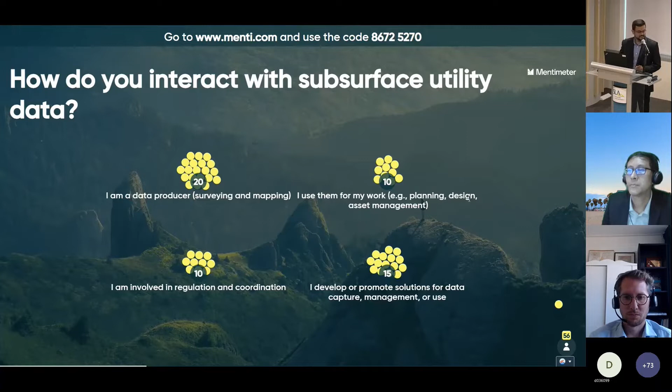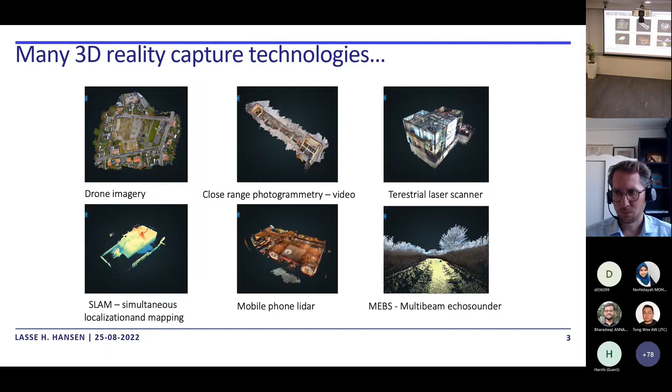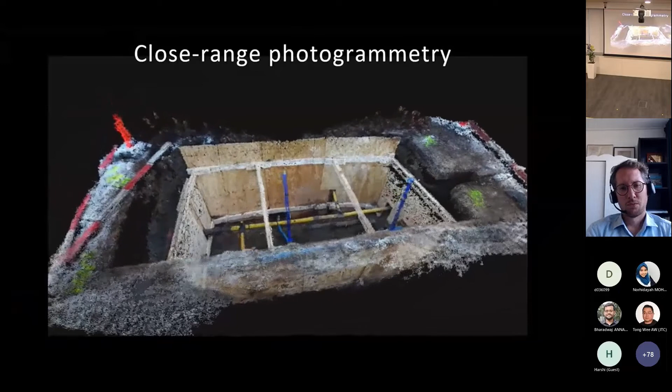But what we will be focusing on today, at least the solution we used for our 3D capture solution, is close-range photogrammetry. Photogrammetry, just a brief introduction - think of it like, photography is the science of taking something 3D and projecting it into a 2D image. Photogrammetry is the opposite, right? So you take some 2D images and recreate it in a 3D scene. That is what we have used for our technology.

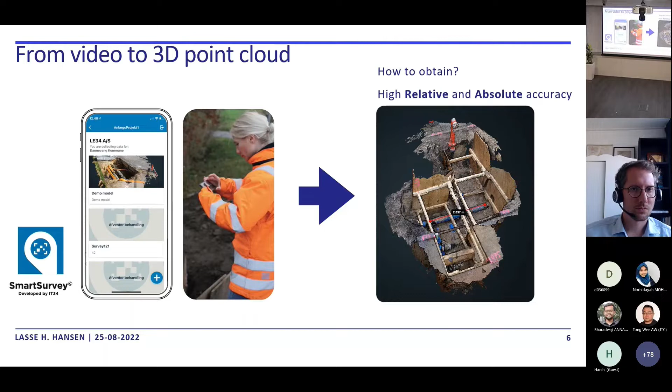Now let me introduce this low barrier to entry data capture. I chose this term because I see both our solution, SmartSurvey, and other solutions in the market can be categorized as low barrier to entry. It's really because of the power of the new technology, all the powerful sensors that we have in the smartphones that we carry each day. So this was really our idea - to take your everyday phone and turn it into, you can say, a 3D scanner, but something that takes a video and creates a point cloud. The objective is really to try to make a point cloud, or take a point cloud, that has high relative and absolute accuracy. This is what I will try to show you today, how we can do this with SmartSurvey.

I, together with HSC, these couple of days we have been hitting the streets and testing out SmartSurvey and other 3D capture solutions. So this is me with Dexter, Kian, and Fuji, and this has really been great that they made this opportunity possible.

What I realized doing this, is that Singapore is very, very hot. I had the original idea that we should do this out on the street, so we should just gather around and try out these capture technologies. But oh my God, it was thankful that somebody told me, okay, let's just video record everything and take it back here, so we don't have to struggle with the heat, because it is really hot out there in Singapore. So this is what we did.

This is from Middle Road, me and Dexter, and I will take you through the data capture workflow. The first thing you need to do is spray GCP markings, ground control points. You can do that with spray paint or something like that. Our recommendation is to do at least 4 markings close to the circumference of the excavation.

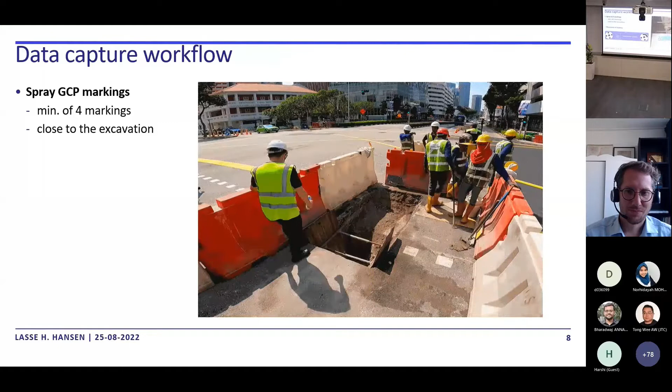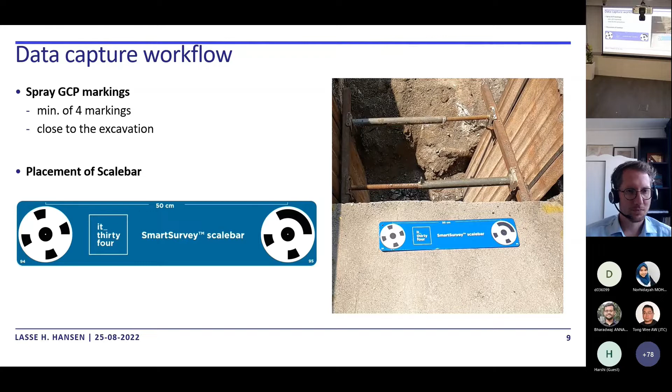The other thing we have also implemented in our data capture workflow is the use of a scale bar. This scale bar, you also place close to the excavation hole. It has visual markers, and these markers are placed exactly 50 centimeters apart from each other. So our photogrammetry algorithm detects these visual markers, and then it knows that these are 50 centimeters apart.

The next thing you have to do, of course, is video record. We made SmartSurvey very versatile - you can take whatever phone you have, Android, iPhone, and then you have to do a smooth and steady movement.

Recommended is having a bit of tilt. Also, really capture the pipe of what is interesting, and also remember to capture the GCP markings and the scale bar.

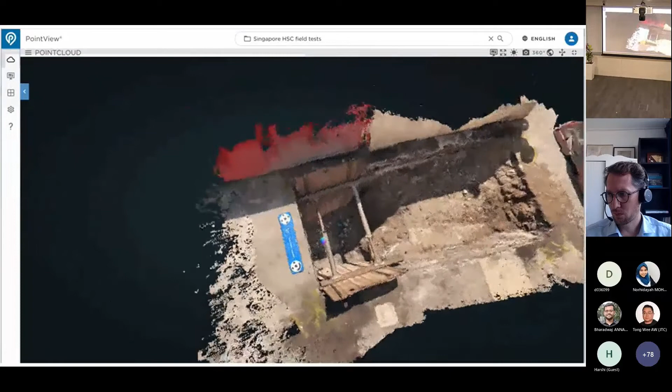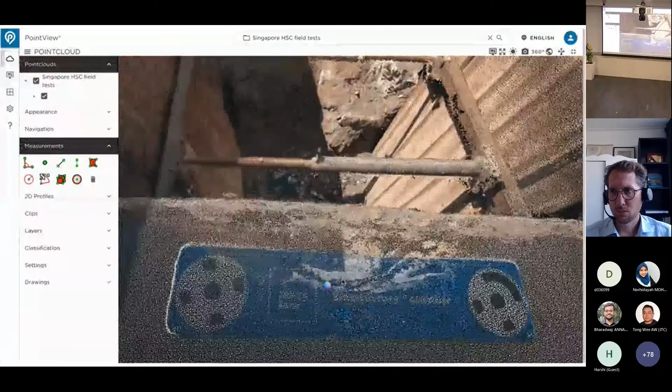So if we just stop here and only have these two data, only have the video from the iPhone, because we have the initial GPS from the iPhone - nothing really accurate, but we can get an indication of where we are - we can make a 3D point cloud just out of that. It looks really detailed, and because we also have this scale bar in view, what you can see I'm doing here is putting in a measurement between the two dots and the centers, and it should be around 50 centimeters. So that's pretty close. So what we actually achieve is a 3D point cloud that has a very high relative accuracy.

Of course, we would also like this to have a high geographic absolute accuracy. So what could be the second step is to, of course, measure these GCP markings, using whatever preferred survey equipment that you have.

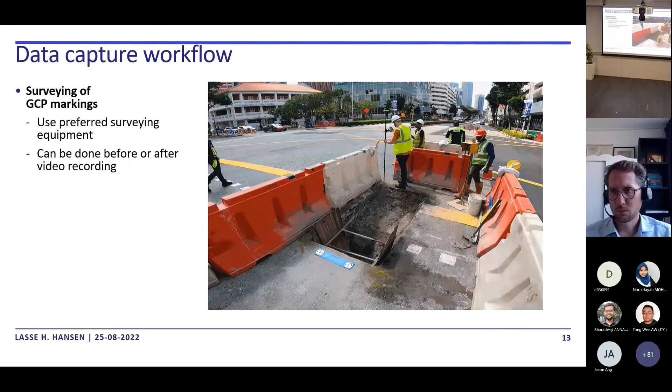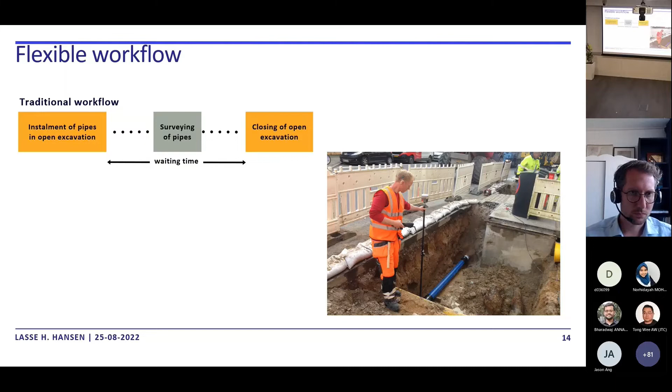I think it's important to note that this could both be done after or before video recording. And I would like to make a point that maybe this could make for an interesting workflow, because traditionally, when you have installed your pipes in your excavation, you kind of have to have a surveyor come out and survey the pipes before the excavation gets closed. And for that, it can be a bit inflexible because there can be a lot of waiting time in between.

With SmartSurvey, it makes it possible to have another workflow where, as long as you have marked the GCP markings and have video recorded, you could actually go out afterwards and measure the GCP markings. This, for example, is from another site where we went out the next day - you maybe don't want to wait a week because then the markings will be washed away, but it is actually possible to go back and measure these markings again. That is for sure an interesting aspect.

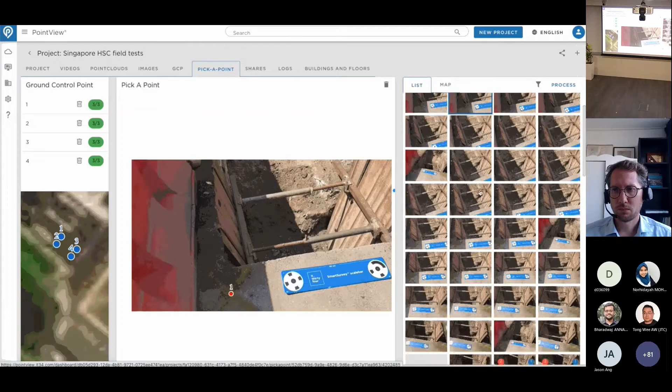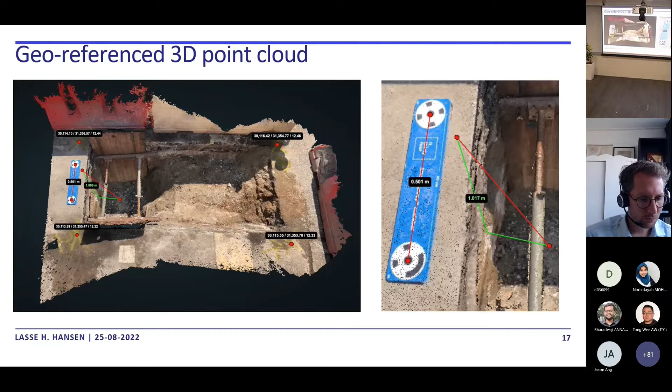The next step is really, now that we have your coordinates and your GCP markings - this is from PointView, where our video ends up from SmartSurvey, and here we do what we call pick a point. So we georeference all the coordinates to the image, and by doing that georeferencing, we end up with a georeferenced 3D point cloud. That is at least one way to end up with the result of a georeferenced 3D point cloud.

I want also to mention something about the best practice of video recording. So here we are at another site with a pipe-laying trench, and how you video record and what kind of phone you use definitely also matters. I have taken here two cases.

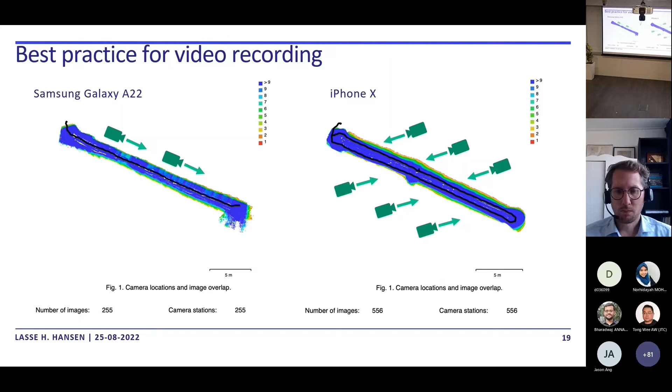One is with a budget smartphone, the Samsung A series, where I only did one walkthrough down the trench, and the other I used an iPhone X - not really a high-end phone anymore, but it certainly was high-end four years ago or something like that. With the iPhone, I walked around the pipe trench, and what you also see is that it certainly had a lot more images and also from different angles of the trench. And here's the result.

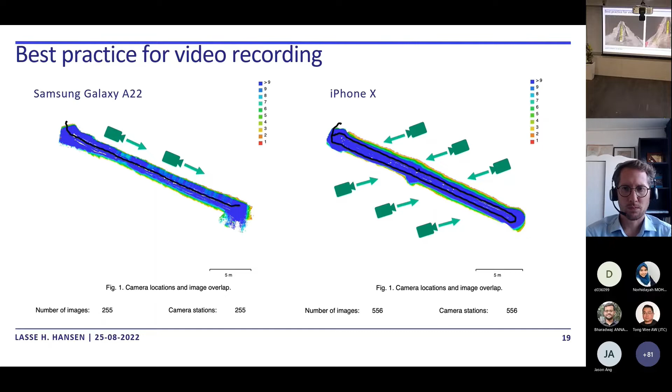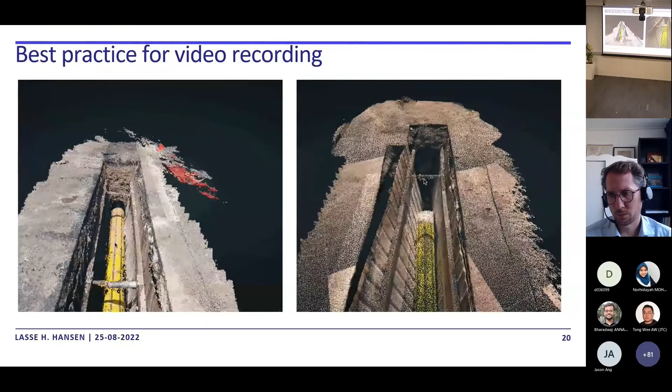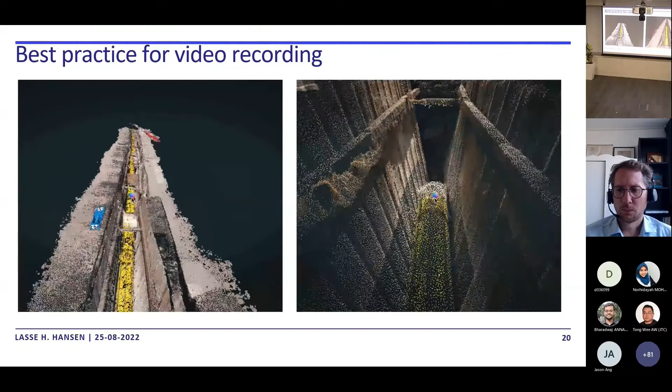Not that I would say either of these point clouds are bad, but visually it is for sure that this one on the right side is more high quality, and the fidelity of the point cloud is better. Also notice how, the thing with photogrammetry is it only captures what you record, right? So if you don't get it from a certain view, it will not end up in your 3D point cloud.

Okay, so you have probably also seen the teaser video from this workshop, and here there was this smart external GNSS antenna attached to it, and this is also something done - something new we have done here with SmartSurvey. So we tried to see, could we even make it even smarter?

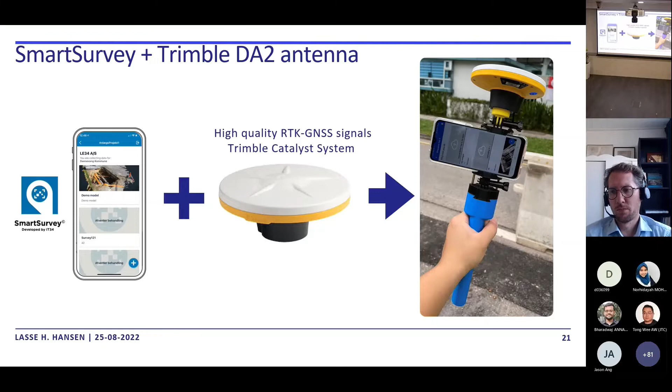So what we did was we used the Trimble DA2 antenna. Maybe some of you know Trimble, but it's a high quality GNSS antenna, and it works with the Trimble Catalyst system. So just as I showed in the video, we now combine both the video recording together with a 3D path we track alongside the video.

And the end result is the same. We end up with a detailed 3D point cloud that is also georeferenced. So this is maybe a smarter workflow, and definitely in terms of improvements, I would say it's a faster workflow. You don't need the GCP marking stuff, and you don't need the manual work of doing pick and point. And I would also say it has less human errors because it's less manual work.

And we actually also see it is more accurate if, of course, the GNSS signal is good enough. But if it is good enough, we take many more position coordinates along the video paths.

And the last thing I wanted to say is that this is now working together with the Trimble DA2 antenna, but we are also expecting to support more antennas. So this is really exciting, what we are trying to develop here, we think.

And you probably also want to know about accuracy, right? I've talked a lot about trying to get to relatively good accuracies. So we did some accuracy evaluation also.

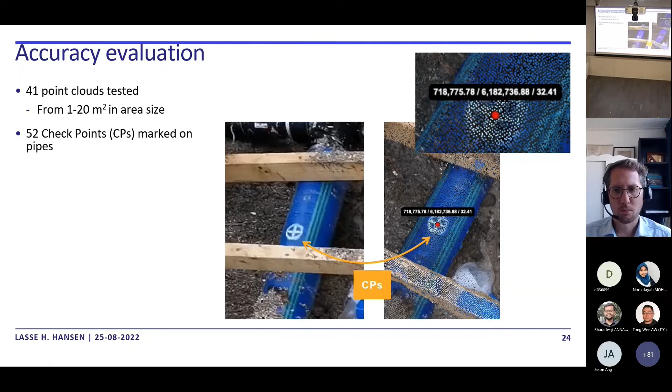Here were our results. We got a root mean square error of around 3 centimeters. So I think we are very comfortable saying that, also across other uses of this, we see an absolute accuracy around 2 to 4 centimeters.

It is, of course, again depending on how well the survey equipment you have used for the GCP markings, and how well you have done the pick and point precision.

Again, I would also say that the relative accuracy, so for doing measurements inside the point cloud, the relative accuracy we can get below 1 centimeter if we use the scale bars also.

Also just to mention, this was a test done with the GCP workflow, but we have also, of course, done a test just now with the Trimble DA2 antenna, and we get a similar result, if even better.

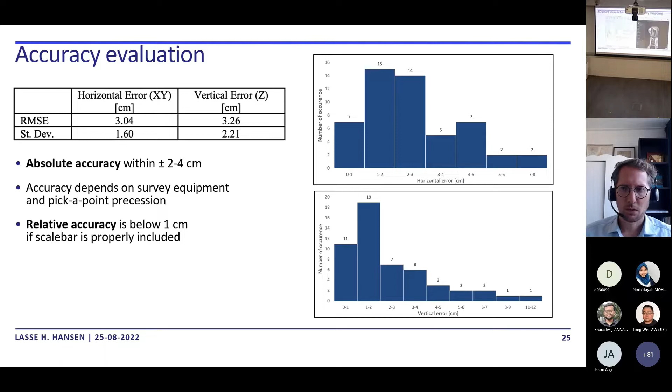So what now after surveying, right? SmartSurvey was developed together with utility companies in Denmark, so there was really also a focus on what to use it for after surveying.

So for mapping, and what we have been doing together with the utility companies in Denmark, that Michaela—she's one of them, the last speaker, she'll talk more about—is how we digitalize inside the 3D point clouds.

So we actually do the traditional utility mapping inside the point cloud, and then we take this vector line we draw on the point cloud, and we can then directly import it into our GIS system, whatever system the utility companies are using.

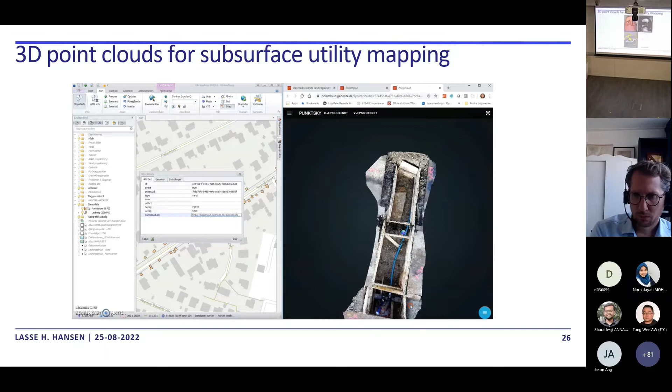All right, okay, so the last thing is I wanted to recap why we do this, and I want to use this Mr. Incredible meme that I like very much, because it describes the cycle of a utility, right? So the installed utility, like in the physical world, that's Mr. Incredible.

Then it goes through this data quality loss process. So maybe the contractor doesn't deliver all the information, and then everything is flattened into a map and becomes this utility map, and afterwards we take the utility map and spread that onto the surface again.

So if we really look at it, I would say that what we are doing with traditional surveying and producing maps is really just taking information and representing this representation of Mr. Incredible. And what SmartSurvey does is really try to store the actual 3D representation of Mr. Incredible as a 3D documentation source.

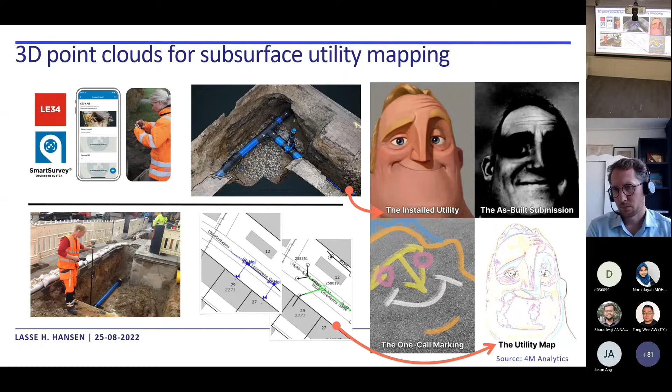Yeah, that's it from my side.

Any questions? Yeah. One minute.

I think different solutions come from different needs and directions. From our side, it was really a cooperation between clients and others that started our development of SmartSurvey. So I see different directions, but going in the same direction, sort of.

Yeah, really good answer. Thank you, Lasse, and Bharat, over to you. Yeah, thanks, thanks Rob, and thank you once again, Dr. Lasse.

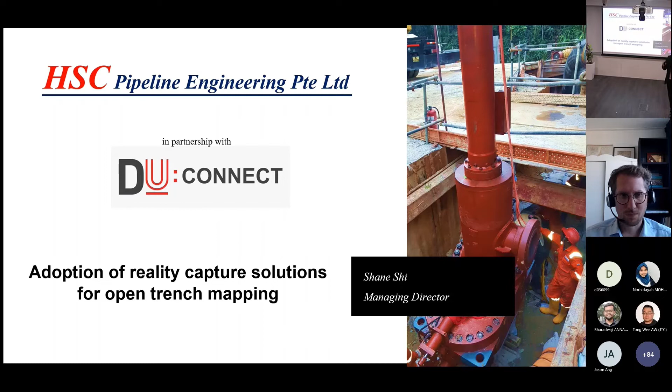HSC Pipeline Engineering is actually a trenching contractor. We have done this for 30 years. We have been doing gas pipes, water pipes, utilities in general. So we are very familiar with the cut and cover and the issues surrounding this particular activity. So we're just going to quickly run through the problem, the solutions, and some of the advantages that we see in adopting reality capture.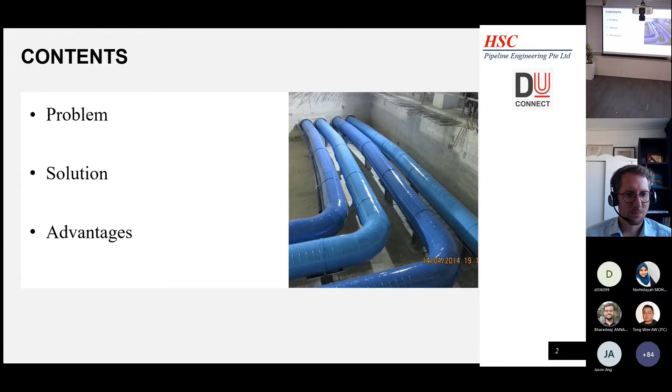I think our peers here will be very familiar with trenching on the road type of activity. It is crazy because in a construction site, maybe 8 o'clock we can start work, then continue to work maybe until 8, 10 o'clock, depending on the site, especially in developments or HDB developments. But when we talk about LTA roads, it's a totally different ballgame.

Because if at 8 o'clock, when you're driving to work, there's a contractor blocking the road, the first thing you will do is call LTA: hey, the contractor blocked the road already. Then at 5:30 or 6 o'clock, when you're driving back from work to home, you see another contractor blocking the road, you also can call LTA: hey, this contractor is still working on the road at this hour. So we're actually bounded very strongly by the road opening hours, which is 9:30 to 5.

Then between 12 to 2, we will be doing pipe laying. We're joining all the pipes, pipe fusion, electrofusion, joining, coupling, whatever. Then we actually need to start backfill at 2 to 2:30, graded stone 2:30 to 3:30, premix 3:30 to 5. By 5, we have to open the road. If not, 5:15, LTA with their smart camera can see us, then they call us: HSC, why haven't you opened up the road? How long are you going to take? Blah, blah, blah. And within all these activities, we are so packed already.

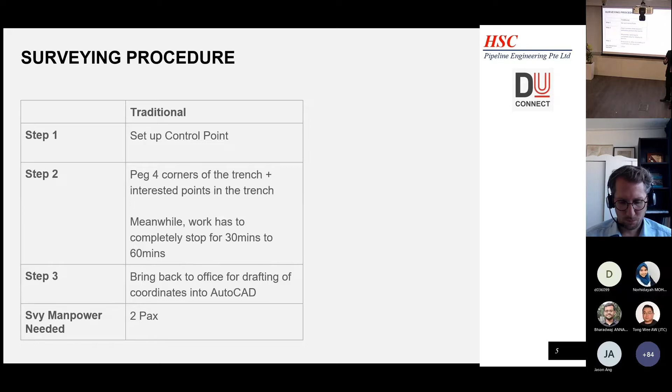Step 3 is very simple. Once you've collected all the data, we bring it back to the office and the draftsman's job is ready. The survey manpower, not including drivers or transportation, the survey team is minimum two people, one with the station, one with the ruler.

Then we extrapolate this issue, and it's even bigger. Every excavation team actually needs one survey team, because right now I only have one team to survey at 2 o'clock. I cannot have the next team at 3 o'clock, the next at 4 o'clock. We cannot say one survey team serves 5 excavation teams at 9, 10, 11, 12 o'clock, no way. So effectively we need one survey team to one excavation team. In today's context, with severe lack of manpower and severe lack of trained manpower, this is actually a very big issue.

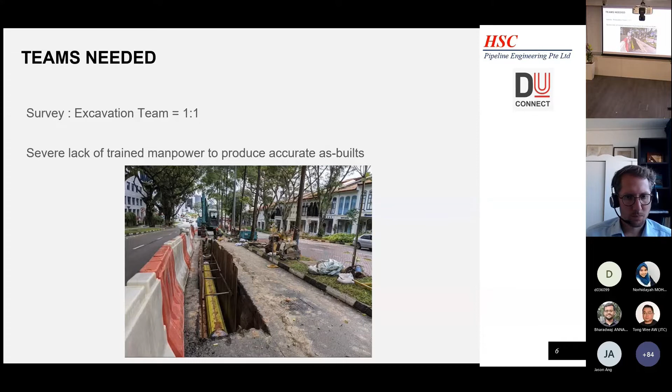So the solution we realize is already there, we just need to look for it. Under the SLA Code of Practice Standards and Specification for Utility Survey in Singapore, version 1.1, as-built surveys can actually be done performing total station, which we're very familiar with, GNSS RTK, also familiar with, and 3D laser scanning.

So this is what we are using, as we came to realize this is a very good solution. Number one, we use the iPhone 12, but please make sure it's the Pro series - I'll explain a bit more. We use the ViDoc, we use Pix4D Catch and Pix4D Cloud, and just one man. So what is this combination?

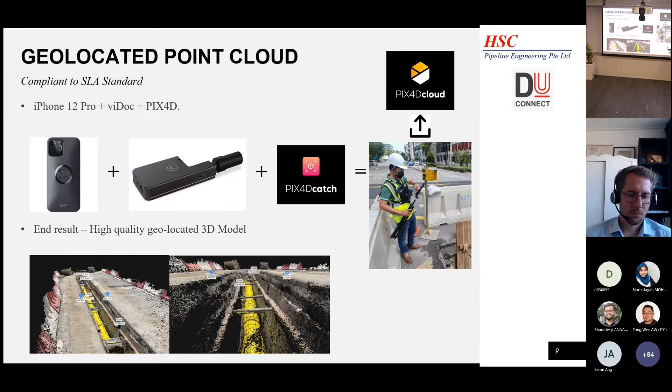We are still using photogrammetry, still taking photos, capturing data from there. We are using the ViDoc as the GNSS RTK that gives you geolocation, and we are using LiDAR points - the iPhone 12 Pro series actually has LiDAR - so it combines these 3 data sets to give you a very highly accurate geolocated point cloud. You'll be able to see something like that, and we'll explain a bit further, but you can see this is a one-man operation, similar to SmartSurvey.

So now we change our process a little bit. Instead of setting up a control point which might take some time, we just turn on everything and check that the satellite signal is okay. Number 2, we capture, we walk along the trench, but the work doesn't have to stop. Step 3, finish already, same as before - we upload to the point cloud, then it's the drafter's problem, and we pass it back to the drafter.

I think the best part is here - in survey team manpower wise, we actually just need one person. So imagine now you have 2 techs, you can separate into 2, you can have 2 teams. So that is very cost efficient for the survey teams as well.

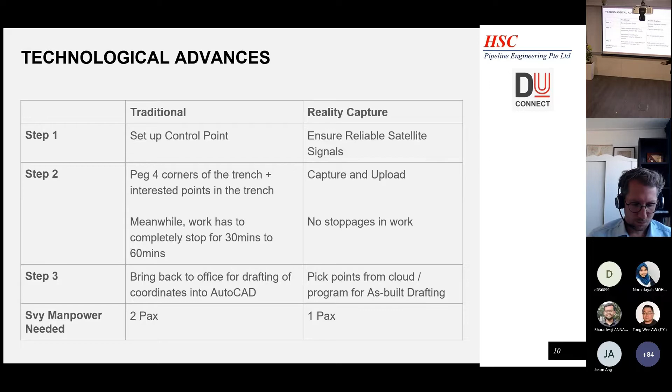So this is how the thing is done. Same trench, same site - actually both of us use the same time. So we just capture along the trench.

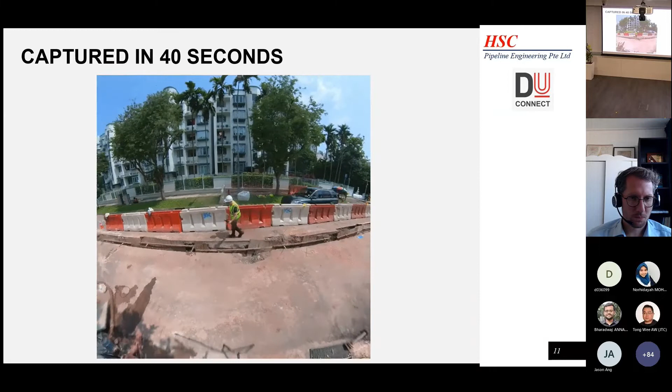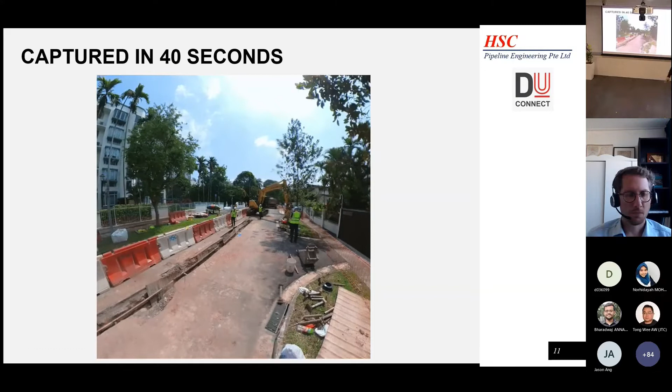And it's done. The good thing about Pix4D Catch is that when we use it, there's some visual elements inside the app itself that tell you the point clouds are being captured. You'll see this cloud that slowly backs away, then you know that this part is already captured, and you're safe to carry on with the capture.

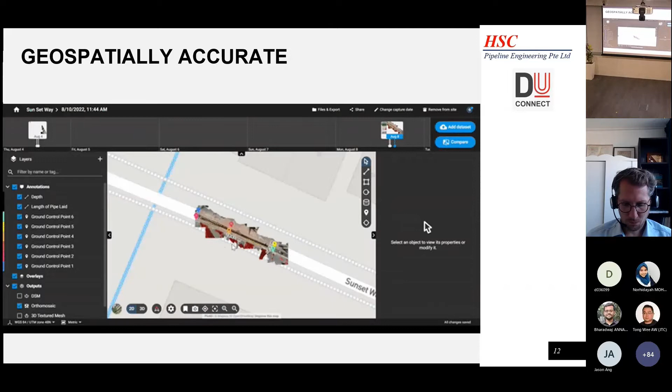And it's actually geospatially accurate, given this setup. So we can zoom into the location. The location you can see in street view, satellite view, and you can also know - okay, the next one, sorry.

So this is topography. That means when we click, okay, Northing, Easting in the Singapore context - so there's no conversion that's needed as compared to if you're using long-lat type systems.

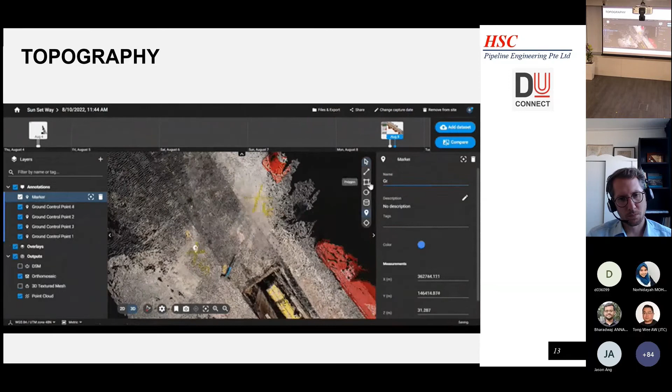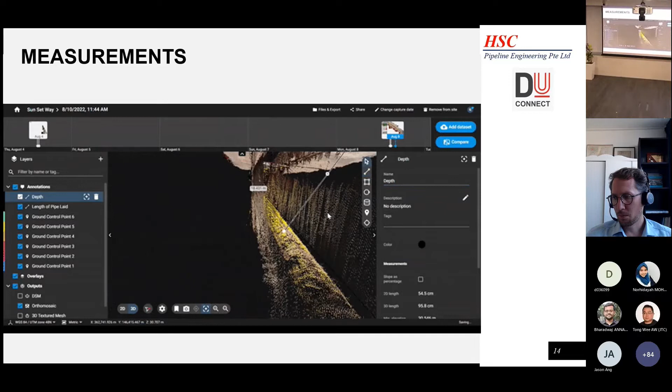Measurements can be done in any part of the trench that you need. You can click from the point cloud, from the point on top of the road to the point on top of the pipe, and you get a pipe depth. If you click from the start of the pipe to the fitting, you know the length of the pipe, or to the joint, you know the fitting length. This gives us a very comprehensive point cloud that we can use, and we can extract a lot of data from here.

For reality capture, I think the best part is that in the bigger context, when we excavate, we will start to see a lot of services crossing, and we can capture this to better update certain services plans and utility maps as we go along.

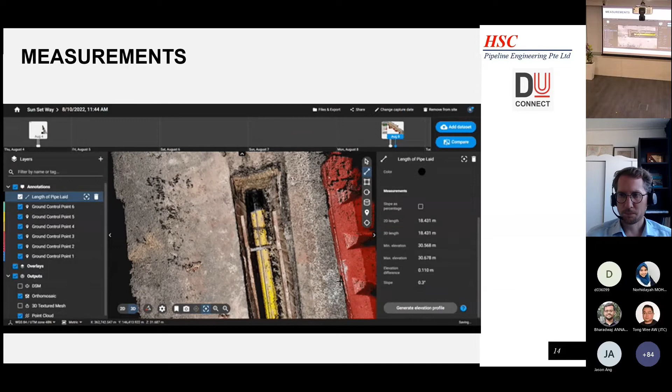So you see all the lengths, all this is there. Seeing is believing.

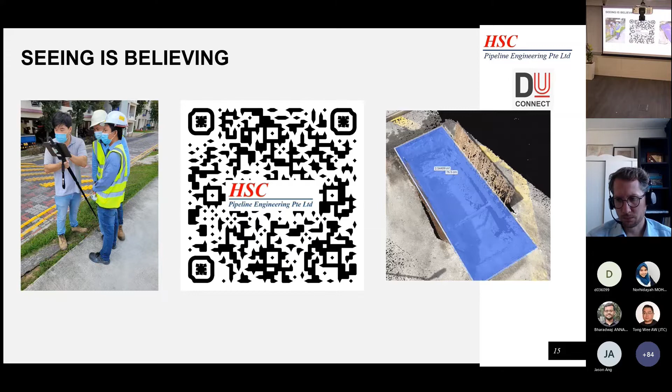So we can measure areas. Some contractors, some clients, they like to see what's the volume of excavation. Then you can do this. They want to see what's the area they excavate. You also can do this.

So it's something that is easy to do, and this is much less intensive in my mind for the guy that is capturing the points. Maybe they miss certain points, but now we capture, we bring it back to the office, and if you want to check any point, it's also possible.

So advantages - this is just making real business sense. A traditional total station can cost something like 30 to 50K. This is something that is open to everybody, nothing hiding. Of course, you can use the Rolls Royce of total stations - all this is up to you.

Manpower typically costs 4K, inclusive of everything - for example, levy, and so on. So each person costs about 4K. If you take a 2-man team, that's 8K, times 12 is 96K. 96K plus 50K, on the higher side, is 146K annually. If you use reality capture, our setup costs about 12K. One pax is 4K, times 12 is 48K. 48K plus 12K is 60K. So you have 60K compared to 146K.

That's just the first year. In the second year, you technically do not need to pay for the equipment anymore. And your 2-man team becomes two 1-man teams, doubling the revenue.

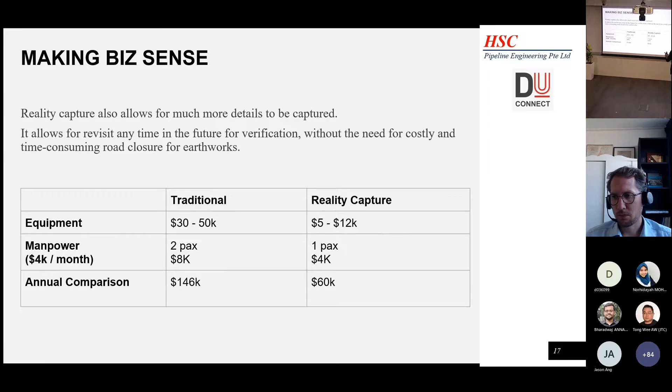So that's the end of the presentation. I'm more technical, more down to the ground, to talk about what's realistic on the ground and whether we can make business sense out of reality capture.

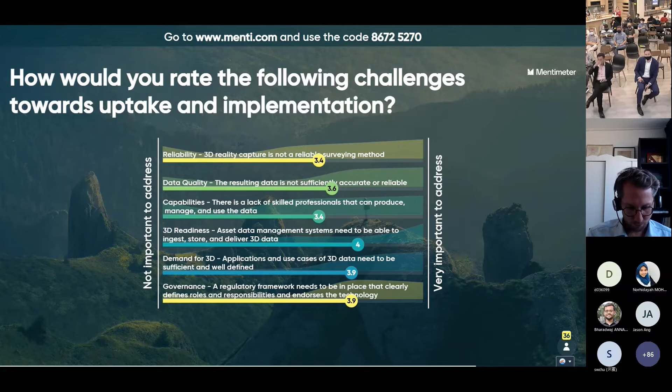Hello, everyone. So you're asking about the gap in the technology development, right? Well, I think the gap is, I guess, as the technology develops, the gap will always be there, but it's always a new gap, right? So technology is continuously developing. So yesterday's gap is today's solution, and then there's a new gap every now and again. So it's difficult to pinpoint a particular gap, I would say.

Agree. Yeah. Thank you. Thank you.

And the other question is about the capabilities. I think even Shane was mentioning about the lack of skilled, qualified professionals. Any registered surveyors here? Maybe I can name Mr. Chia Ekok. Maybe if you want to attract more talents, what can be done from the government side?

Chia Ekok. Give me a minute, I'll pass over the mic to you.

I think it's a well-known fact that in Singapore there's no institute that provides training for land surveying. Even Polytechnic has stopped the land surveying course for a long time already. So we are now taking in a lot of graduates.

From Malaysia, and my company took in a lot from China. So we will need these people to be able to assist us in the processing of the data.

Thank you for your interest and inviting me for this digital underground connect. As told before, my name is Michaela Bloch Eiris. I have 20 years of experience working in Danish utilities. Now I work at the Kalundborg utility, which is a smaller utility. We supply our customers with water, wastewater, and district heating.

I have in the last 5 years participated actively in the development and implementation of point clouds. I have given many presentations about how I implement point clouds, but never in English. So let me know if some of my points are not so clear to you.

When Lasse was doing his research work, he brought 3 utilities together and formed a group that discusses the spread of point clouds in utility companies in Denmark. The 3 utility companies are Aarhus Utility, Novafos, and Kalundborg Utility. Novafos and Aarhus utilities are big companies in a Danish context.

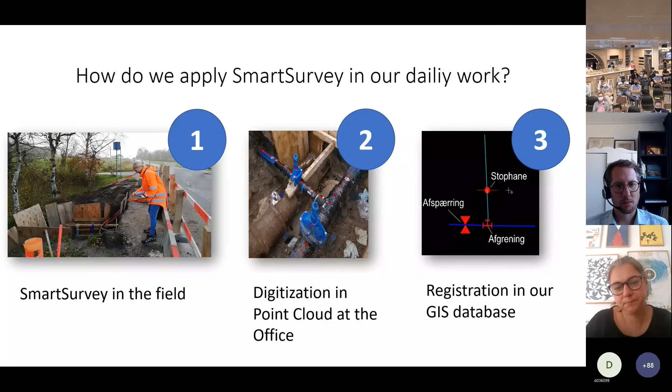All point clouds generated with SmartSurvey is automatically available to the organization in the utility. This is a very important point in implementation, that data is available to the organization. And I will now show you how Novafos uses their WebGIS solution to display their point clouds.

So I will go live now and show you. So what you see, I hope you can see the WebGIS solution now. As I told you, this is the Novafos WebGIS solution. So they have the classic traditional water supply registration here.

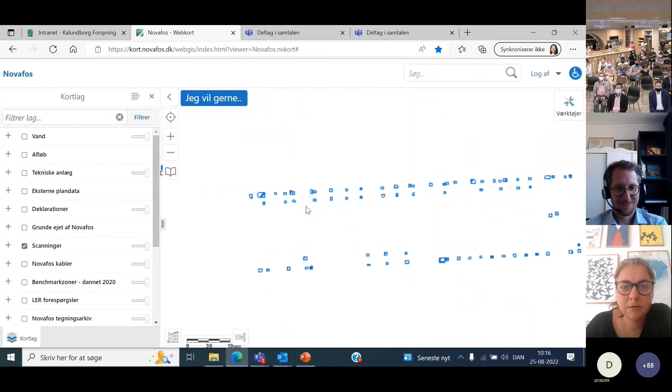And they also have the point clouds. It's a little bit small. I can zoom in now, and then we should come to the bookmark. I will zoom in here, and we will see the point clouds.

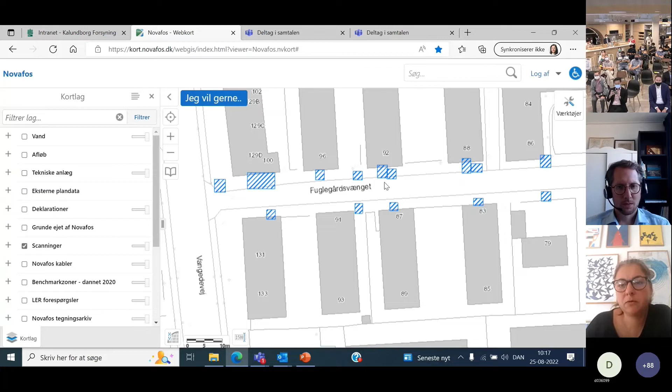So this is a project where they have done some renovation for the water supply, and here you have all the point clouds. To see the point clouds, you have to click on the polygon, and you come into the point cloud. Now the point cloud is loaded into the viewer, and it is always this viewer that is used to view the point clouds.

Novafos has about 6,000 point clouds, because they have decided that all open trenches should be filmed, and they make these point clouds of this. The last 4 years they have been doing that. So now they have about 6,000 of these point clouds for their water supply. And this is one of them. So this is the viewer they always use to look at them, and they can panorate and look at the point cloud. I think Lasse showed you that before. It's the same.

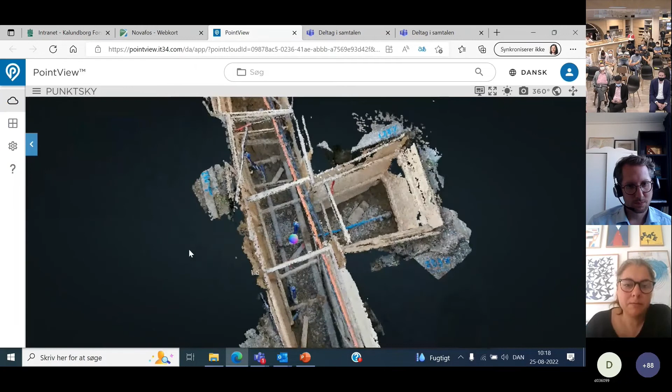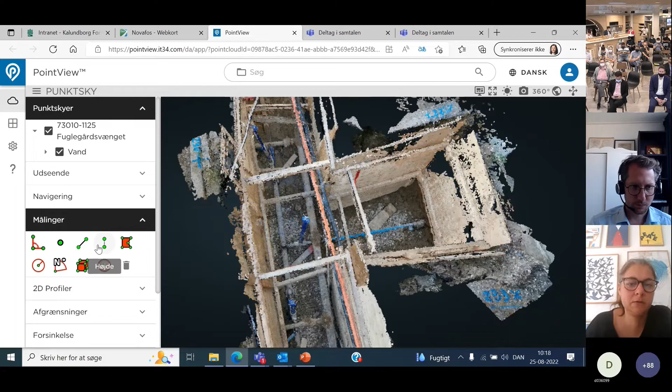They also have some tools available. The measuring tool is the most used tool in this viewer, and it is used to measure. They can place this and see the coordinates, whatever they want. They can measure the distance and the height.

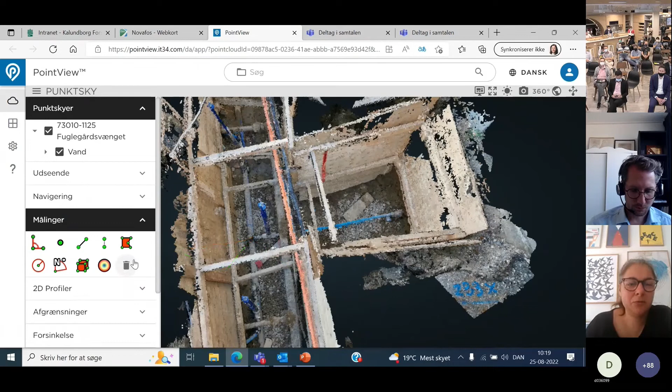And I think these tools are used very often in the organization, and they know how to use it now, because it's the same viewer every time they open the PointView. Another tool that is used is the drawing tool.

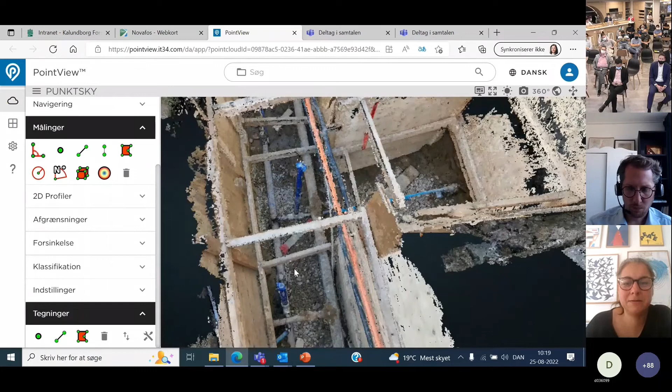And as I told you, we have people who digitalize the assets, and they use this drawing tool. They digitalize the pipe here, and now the pipe is digitalized, and they can export it as a GIS file, and then afterwards import it into our GIS database, and then you have the traditional GIS registration as I showed before. This is how we use point clouds for the water supply.

I also have an example from wastewater. Yes, it's the red one here. This point cloud I will show you now is not from SmartSurvey. This point cloud is made from laser scan, and the reason for that is that in wastewater we often have very deep and dark trenches. So SmartSurvey is not good for that.

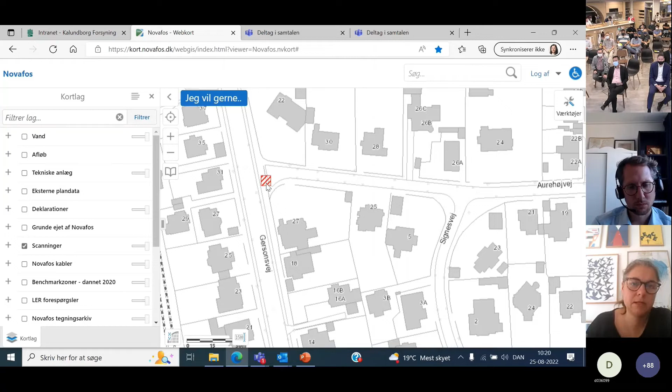So we use laser scan to scan our manholes, and this is an example. Again, the link, and we get the point cloud in the same viewer. This is a manhole for wastewater, and again, panorate, it's the same. You can go into the manhole.

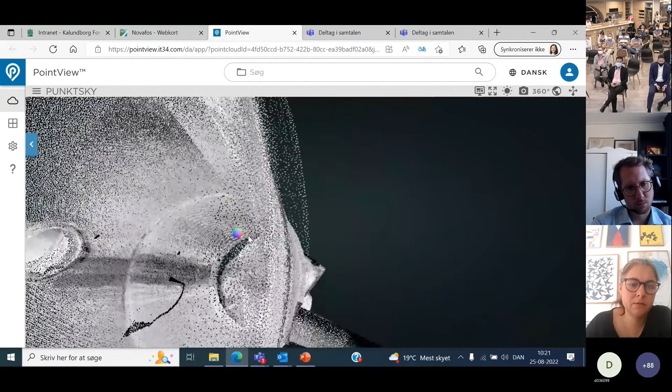And you can look up the data you want. I can show you, I have to panorate. You can see here we have the pipe from the... go into the, yeah, I got that. And you can get the same data.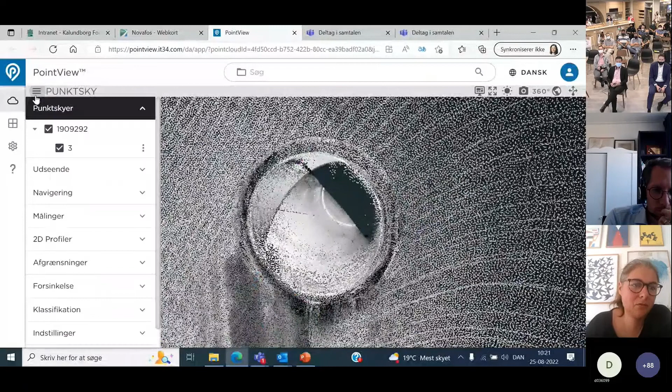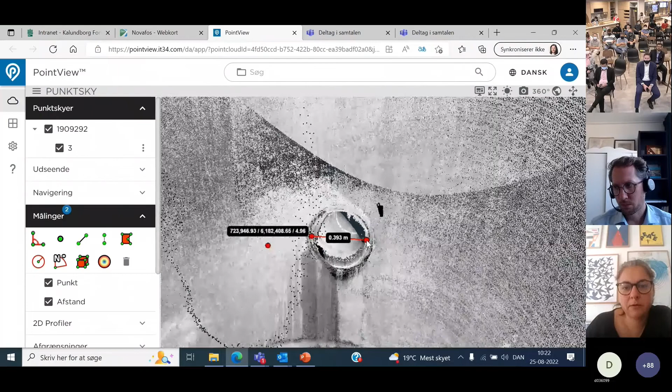Again, measuring tool, and again this is very often used to look up some data about coordinates in wastewater. And you can measure the diameter of the pipe, also very used. So we also have documented many of our manholes in this way for wastewater.

So it is very useful for our staff in the utility. So this was the Novafos WebGIS solution, and I will go back to the presentation.

So what are the benefits of using these point clouds? I see some related to documentation of the construction work in the field. We can check that the installation work has been carried out correctly. Our operation manager looks through all the point clouds to check the construction work, and they find errors. And they can check that the distance requirements to other assets are complied with. Sometimes there is a disagreement about if the distance requirements are met, and the point cloud is a great tool in this context. The point cloud can be used to estimate the amount of soil and the size of the trench.

Sometimes there is a discussion between the utility and the entrepreneur about the amount of soil and the size of the trench. This is a money question, and the point cloud can often clarify this.

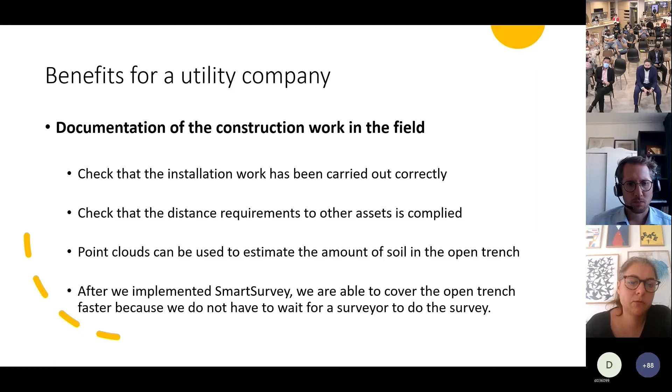Point clouds are a supplement to the traditional utility registration. You can measure and orientate yourself in a completely different way than in the traditional utility registration, as I showed in the Novafos PointView viewer.

Information from the point cloud can be used for future design and planning. We can look up in the viewer and see all the details from the latest construction. An example could be backfilling, which is often not registered in traditional utility data.

Another benefit is that this new data can lead to development of new solutions that benefit the utility, and I will come back to this issue later in the presentation.

So what are the challenges then? The best point clouds are made by daylight, as I showed you with the wastewater manhole. Alternatively, a light source must be brought along, and also the best point clouds are made when the trench is not too deep.

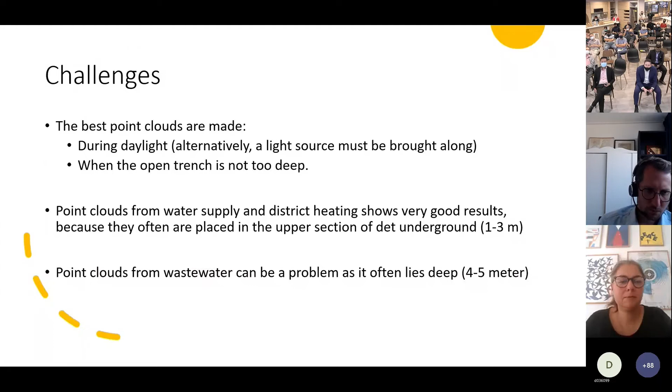The benefits are not limited to the individual utility. Sharing point clouds could provide value to other asset owners in the underground. In Denmark, we have LER, a register of assets in the underground. In LER, all assets are registered by traditional mapping, and it is a legal requirement to obtain this information before working in the underground.

So the point is that we have to share the point clouds, and I believe it should be a legal requirement.

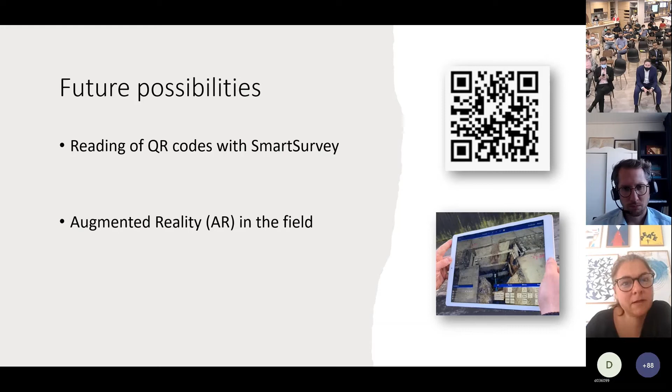Can QR codes be captured by SmartSurvey? We have investigated if it's possible for QR codes placed on pipes and components to be read from point clouds. The QR code contains a link to an API to a catalog where you can capture information about the product, for example material or diameter. This means we can automate the process of getting attributes on our utility mapping and thereby expectedly increase the data quality. This project is on an experimental basis, but has great support among several water suppliers in Denmark.

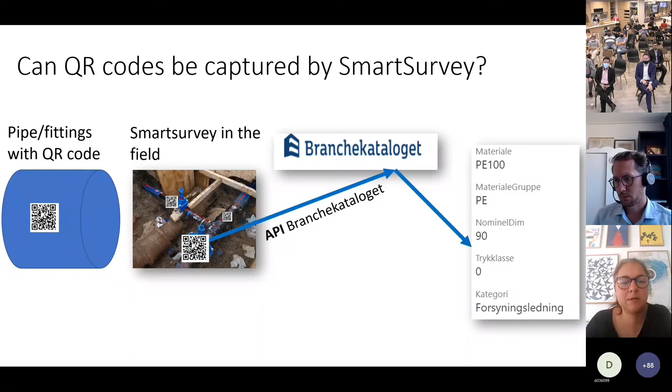I will now show you one of Lasse's videos of this augmented reality solution, and the point cloud you see is from Aarhus Utility.

Michaela, can you hear us? Are you with us online? I can hear you now. Okay, so if it would be good if you could share your last slide, because we lost you in the middle. Yeah, I will share that. From where did you miss? Is it from here, or a bit later? A bit later. Okay, just go ahead.

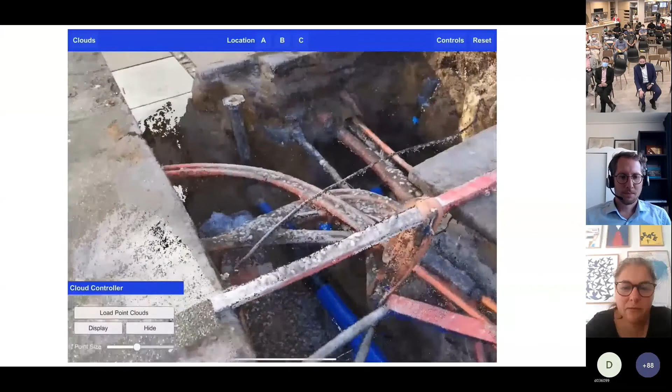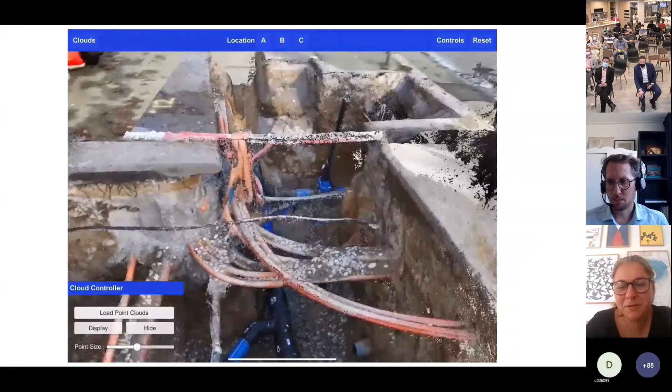So this one, okay. What you see here is Lasse's augmented reality demo. When you look through the iPad, you can see the point cloud. My point is, the solution is really, really cool, and this is an example of how we can use point clouds in the future.

So I think we should go out and make the data, and when the solutions are available in the market, we can use our data in this way.

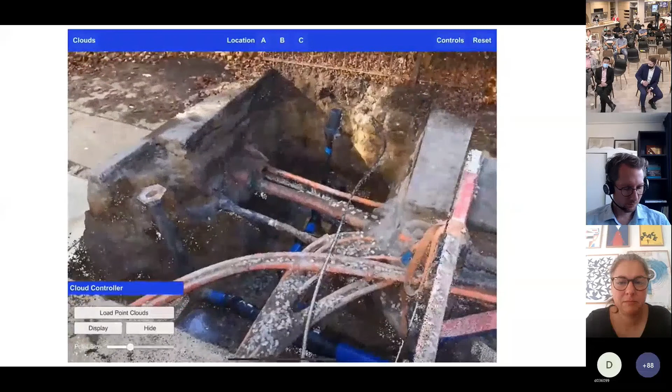Yes, yeah, this is really impressive. Thank you. Thanks, Michaela.